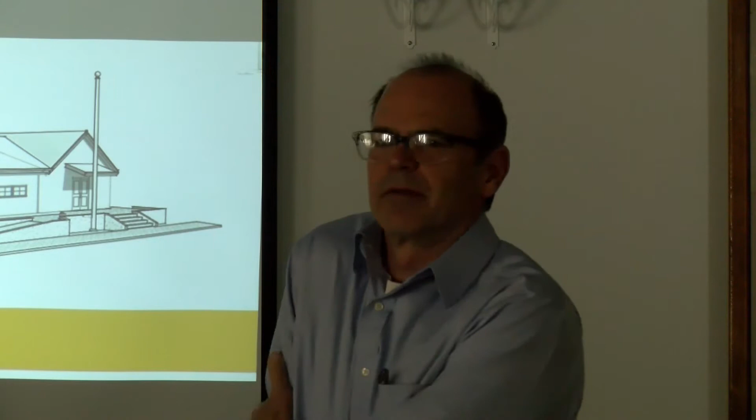Well, good evening, folks. Like John said, my name is Joe Slack. I'm an architect with a company called HGE, Architects, Engineers and Planners. I've known John actually for a long, long time - he was in the building product trade industry for a number of years, gosh, I think in the mid-'80s or early '90s, somewhere in there. So it's been fun getting reacquainted and working with him and all of you as well.

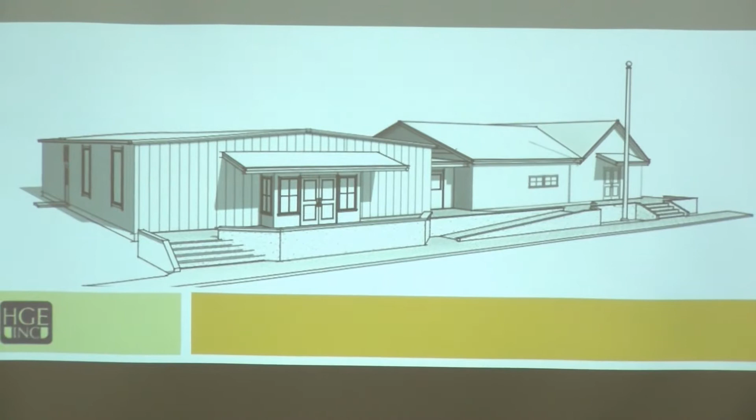Like John mentioned, the feasibility study encompassed what we call needs assessment and concept design. In summary terms, needs assessment means we spent some time poring through the building as it sits now, identifying various systems and issues that need to be addressed to extend the life of the building and make it more functional and more user-friendly.

And so we did that portion. We also put cost estimates on taking care of those shortcomings. And then subsequent to that, we spent time with the committee reviewing what the various needs are of the facility to make it function better. Based on that, we went into some concept design. I'll run through those relatively quickly, but if you have any questions, let me know.

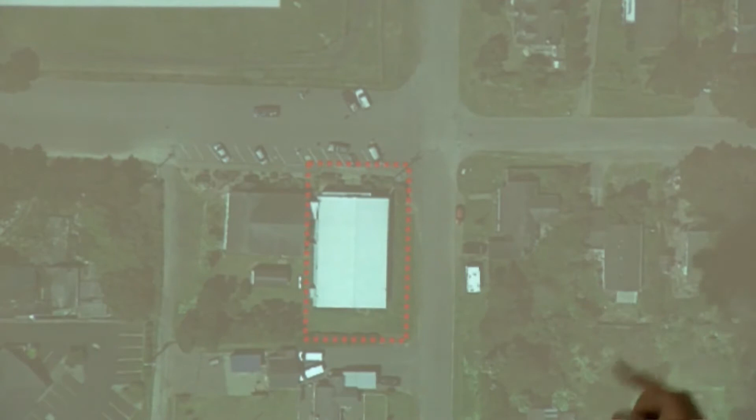So here's our project site. The big white rectangle, that's the community building. I think we had a date on it that was early 70s vintage. It sits right next door to the American Legion building, of course, and north is up. The school is across the street. The credit union is kitty corner on the same block.

And this is Dave's park project. What do you refer to? Peace Park. Peace Park, cleared off quite a bit. So our property is about where that red hidden line is.

So here's a photograph from, we're looking at the north side, the north entry. It's on the north side of the building, so it's primarily in the shade a lot. You'll see some close-up photos of some of the problems with that. So of course, the Legion building sits right between.

There's a kind of a funky sort of margin between the two buildings. It's covered. There is an ability to make it secure. You're not really inside, but then you're not really outside because it's got a roof over it. But it is kind of an open air transition space between the two. It's serving as a means of getting into the building with a ramp. It's a very breezy breezeway.

Yeah, I would imagine. So here's some other photos of the building. What we call a pre-engineered metal building, meaning it came into the site as a kit and bolted together, and then subsequently insulation was secured to the frame, some subframing, and then metal panels secured on top of it.

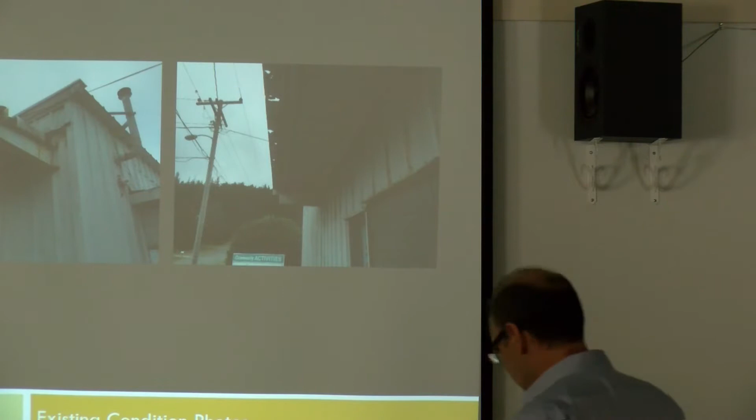The front, this is north side again. Because it's on the north side, it gets wet, and even though the rain's not pounding on it like south-facing building faces do, on the north side it doesn't dry out as well. So we have a lot of rust that's occurring on that north side. There's this little projecting awning that protects the entry, and that has to be removed and replaced in its entirety. It's really rusted through.

And then we have the front door of the building that when it was used, I think, more often as a theater, everything was kind of blacked out. So it's a really ominous kind of entry into the building space. You can't see into it. People can't see out of it very well.

And then, of course, we have all these steps to get to it, which from an ADA standpoint doesn't work. We have this ramp that is posing as an accessible ramp, but it's got issues with it as well in terms of ADA compliance. There's some real specific design requirements to make things ADA, and that has some shortcomings. It would need to be replaced.

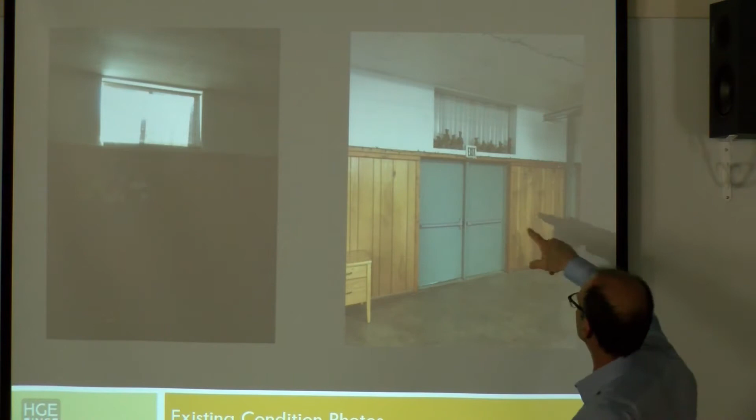Inside the building, here's kind of a dark photo, but you can see the high windows on the east side. This is as architects, we always kind of scratch our heads about stuff. Why didn't they move that door over to align with the... well, that's just the way it goes.

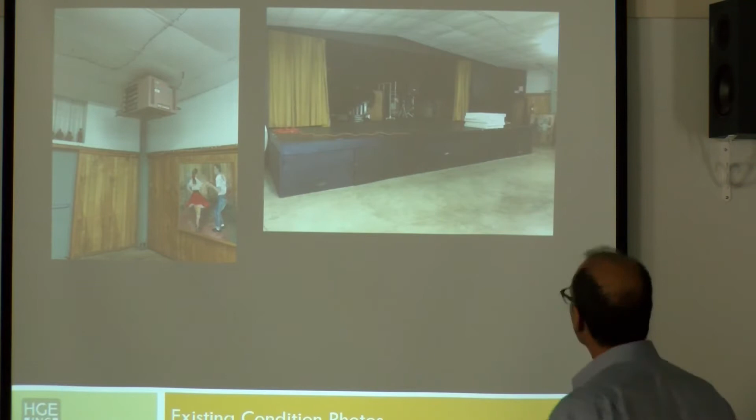So then we have this, a Reznor electric heater, which again you'd find in a shop or warehouse space. They heat the space in terms of comfort, but they're noisy and kind of distracting, so you'd want something else for the type of use you all have planned for the building.

Here's our stage. It really is a stage, 3 feet off the ground, and it functions fine. We don't have a big lot of room above it, but we need that to be ADA compliant too, at 3 foot high. That means 36 feet of ramp with a landing, so it's a little problematic with stages that are that high off the ground.

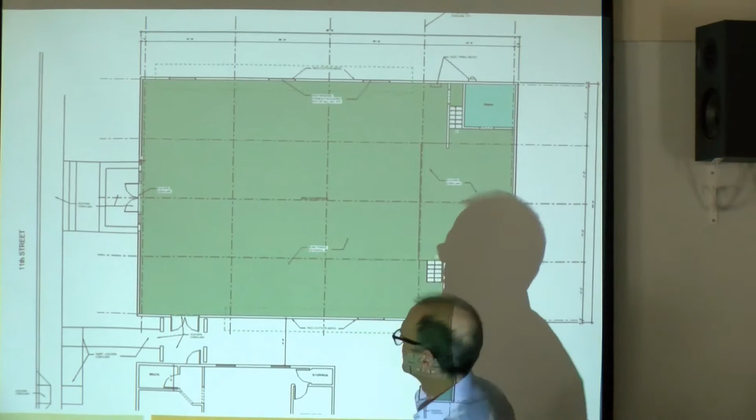So here's a floor plan of the existing building. Here's the steps I showed you, and here's that vestibule space. This space provides connection between the American Legion building and their kitchen, most importantly, to get into the community building when they have functions with food. We've got a pretty good sized kitchen that can feed it, so they really need this connection. There's not a lot of need for folks using the facility to go this way—it's mostly for this kitchen to serve the community building.

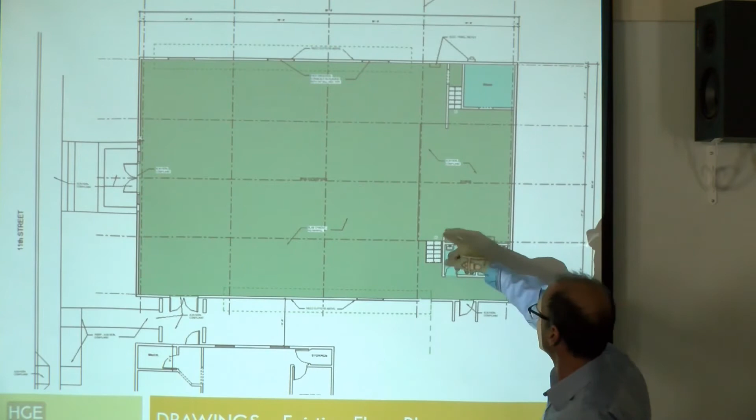And then there's a couple small restrooms down here that exist. This is a really funky women's restroom with 2 toilets in one little room—I don't really understand, I can't imagine 2 people being in there, but maybe so. And then we have the men's restroom. This right up here is the green room for performances, where performers have a place to change and get ready. This doesn't show the stage very well, but it comes out to this line. There's some steps on the public side of the proscenium arch, and then behind the arch on the east side.

So what else do we have? I talked about the windows. The floor could use some repair work. Pretty much every entry has ADA issues, and of course we have ADA issues with the restrooms. The ceiling is not all that dissimilar to this, where the insulation is laying on the ceiling tiles, and it looks great for the first few years, but then over time that insulation and its weight causes them to start to sag.

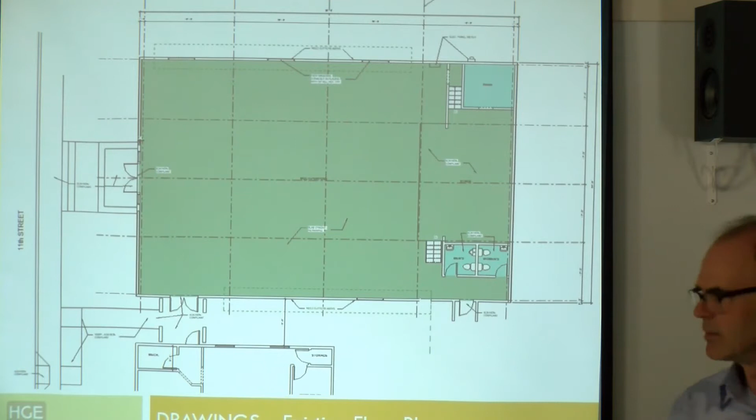So we'd like to put in a new ceiling. The roof has some minor leaks, but it does have leaks, so we're looking at reskinning the roof and painting or reskinning the metal on the walls as well.

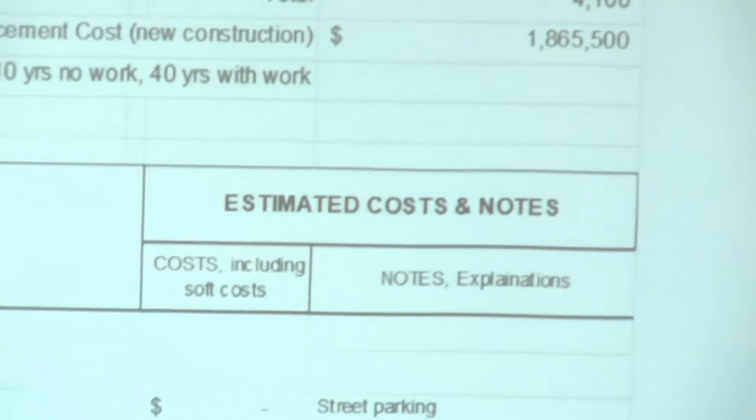So I'm kind of chunking through this pretty good. This is a spreadsheet on what it costs to deal with those needs assessment items that have been identified. We have a few things on the site work, but the building's about 4,000 square feet—if I include that little connecting vestibule, it's another 100 square feet, so about 4,100 total. If you were to replace that building as it sits now, without changing the footprint or the number of bathrooms or making the vestibule bigger, that's roughly a little bit south of 1.9 million.

That's using today's dollars, doesn't include land costs or anything like that. It's about 1.85 or 1.86 million. So for the site, there's a few site things.

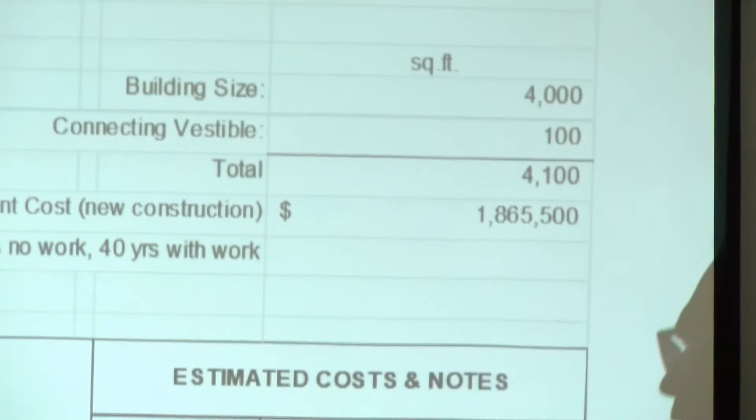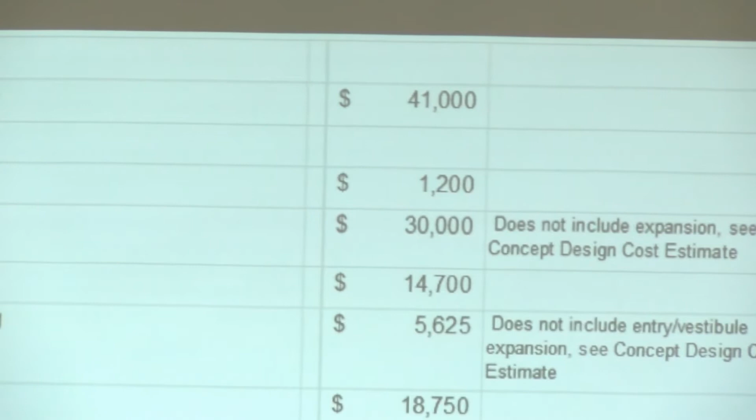Mainly access into the building to comply with ADA, and then we have an allowance for removing asbestos. We've got some rebuilding the restrooms, providing stage access with a ramp, replacing the awning in the front. I did plug in adding an entry vestibule—I'll talk about that in a minute—rebuilding that connecting vestibule, and then siding replacement and roofing replacement.

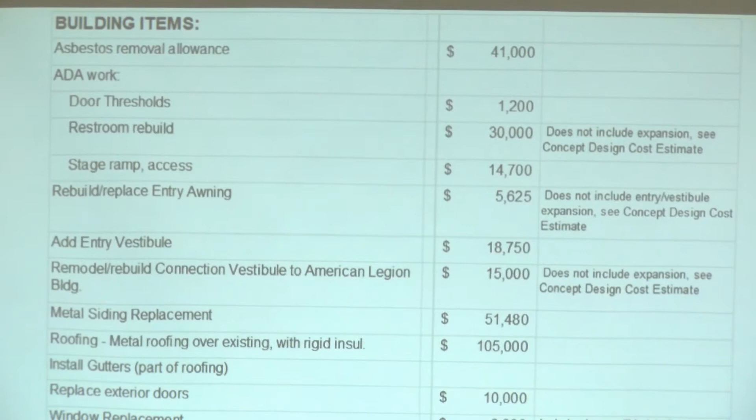Replace exterior doors, window replacement, interior finishes allowance to retreat the floor to improve the acoustical performance of the space for performances, and new ceiling and paint, those kind of things.

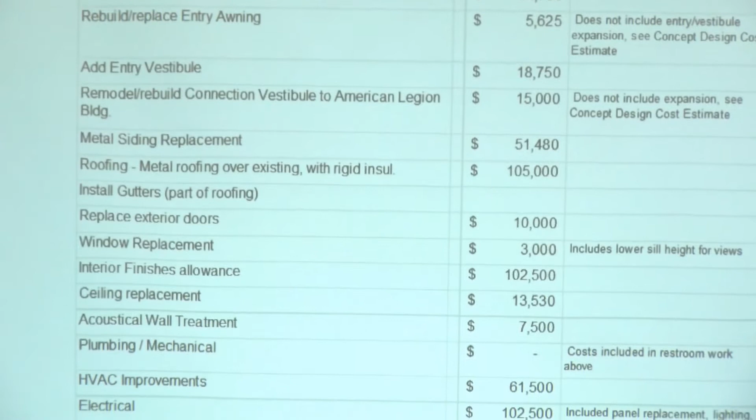Joel asked: Steve, would that include replacing the wood, the simulated wood wall panel stuff? Yeah, that would come out too—we'd just have a new, fresh interior feel to it.

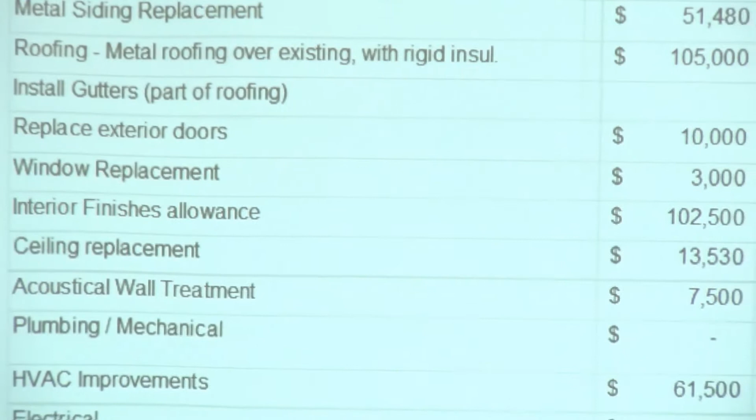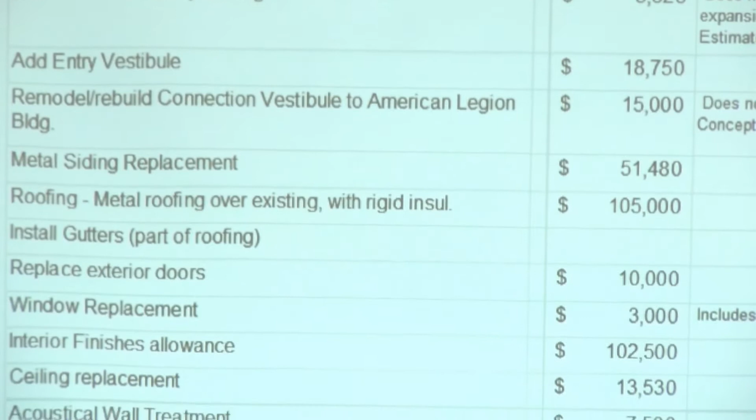I do have ceiling replacement identified as acoustical wall treatment, and the plumbing would be part of that restroom rebuild number. But we do have mechanical improvements—what I imagine is possibly something like a large heat pump that would be ducted, so you wouldn't hear it, providing ventilation and heat as well as cooling. And then we've got some electrical upgrades to do; the electrical panels really need to be replaced, they're pretty worn out. So that totals just under $600,000.

We have a little contingency, 10%, so we're at $659,000. And then we always have to include soft costs for whenever you do project budgets.

That's to provide design, engineering, and architectural work. We plugged in an allowance for furniture, fixtures, and equipment—things like chairs, window furnishings, tables, and the like.

Special inspections are required for construction these days. Of course, we need to deal with permits and fees and have some dollars for that, and then additional soft cost contingency to cover those things that we don't have listed.

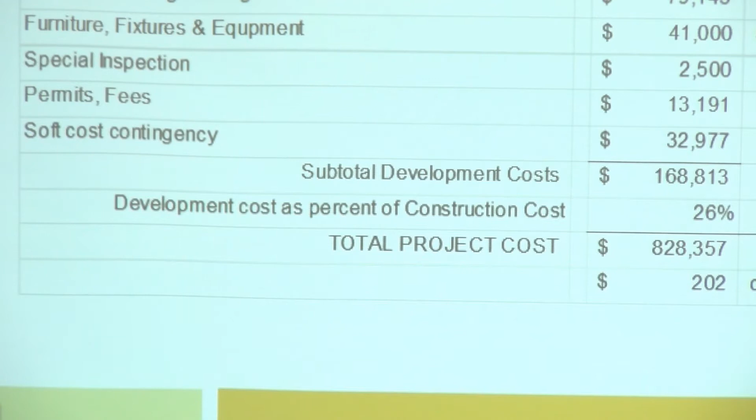So we end up with a subtotal development cost of $169,000, and total is about $830,000, or $202 a square foot. That's what we call a major upgrade on the building.

So then I'll start moving into what we discussed in terms of improving the function of the building, improving the usability of it, and making it more accessible as well as more comfortable. This is kind of small print, but it's just one page, so don't worry.

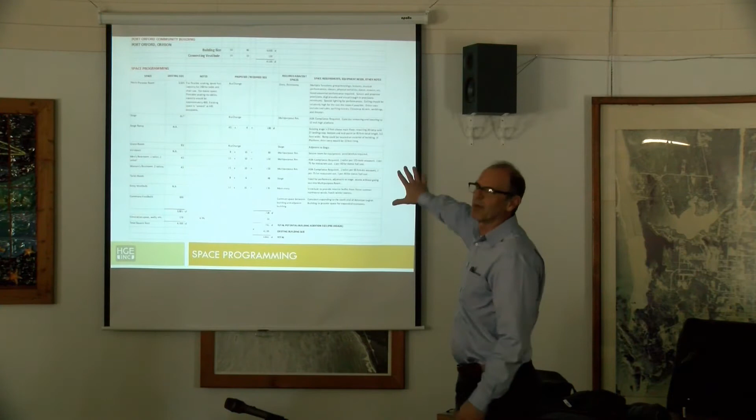I'm listing the spaces that are in the building now and the spaces that are desired or needed in the building to make it more functional. The first item is the multi-purpose room—what we talked about for group meetings, lectures, musical performances, classes, physical activities, dance, movies, etc.

Good acoustical performance is needed, and other uses include tool sales, quilting events, Christmas bazaar, weddings, and theater. So it's a real mixed bag of what we want to do in there.

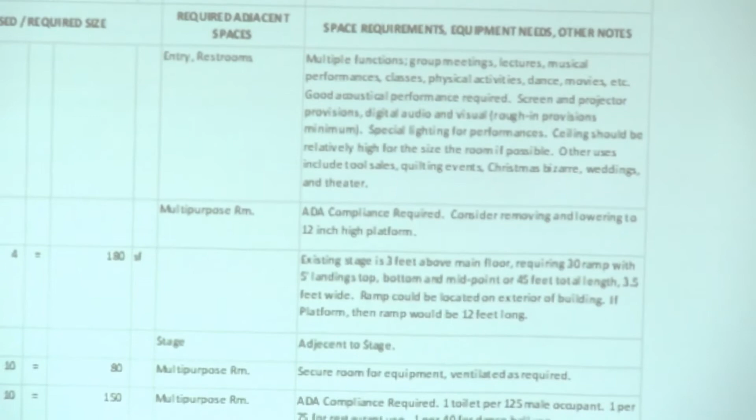So it has a lot of different requirements, and we want to make sure it has that flexibility. The size of it, based on our discussion with the committee, is fine—the space has a capacity for about 200 with tables and chairs, so we didn't mess with the size of the big room. The stage size was fine, but again we have that ADA issue.

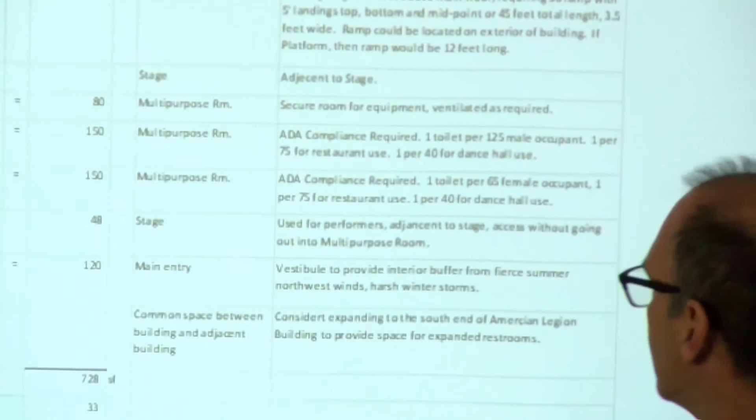Getting on top, getting up to the stage—the green room, there was discussion about getting rid of it, but with the performance part of the use of the space, we wanted to keep the green room in, so that remained.

We do need an AV closet that it doesn't have now. And then the men's and women's restroom, there was a lot of discussion about that. We could just turn those into two single-user bathrooms, but from a code standpoint, if the American Legion Hall is not open and accessible, you need to have more than that.

So on the men's side, would there be a urinal and a toilet? It has that now, but obviously people are going to lock the door—it's not a multi-user space.

And then the women's would be a normal two-stall room with a handicap stall and a regular stall. We don't have the room for that.

We also talked about having a toilet room available to performers, so if there is a performance going on, they need to use the facility without coming out into the seating area. There'll be a restroom available on the back of the proscenium arch for their access.

We did talk about an entry vestibule, given the big, fierce northwest winds we get in the summertime—having a vestibule, meaning an airlock where you come through a door, that door closes, and you come through the next door to get into the space.

It provides a little more comfort for people in the room, some thermal break, but it also provides a buffer for those folks sitting in the back of the room. I think I busted through that.

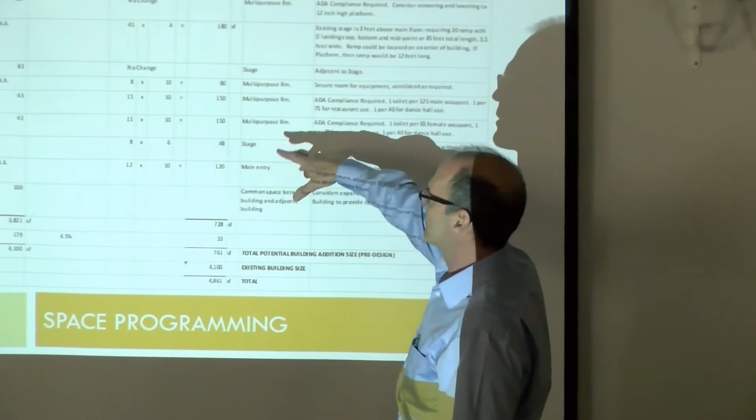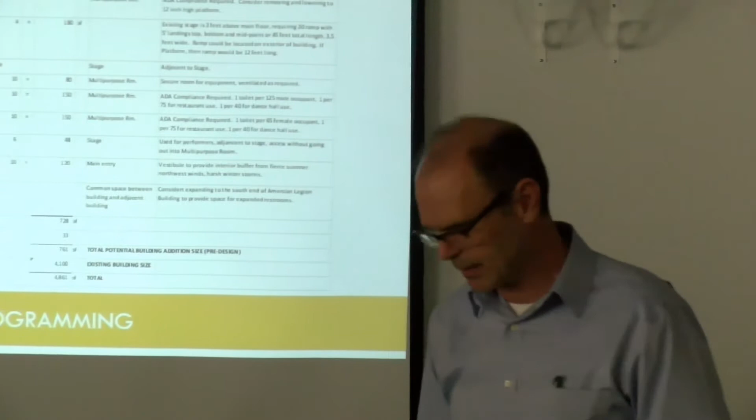So right now there's about 4,100 square feet, like I mentioned. With these additional increases—like in the restroom and the vestibule—we need about 4,800 square feet, so we have about a 700 square foot bust, so to speak, that we need to find more room for.

We would rebuild these bathrooms, but we utilize the foundation that's intact there, and we take this vestibule out and rebuild it.

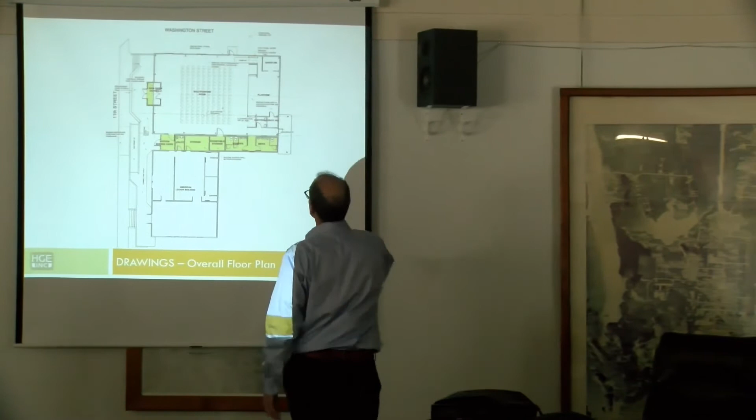This shows the community building and the American Legion building. Like John mentioned, this American Legion building is a work in progress right now—we haven't gotten to the point that the community building is, but this reflects what the folks want to do in here.

Dick and his committee want to expand the size of what's right now a kind of common space here, and we actually expand that room up. The yellow represents new construction.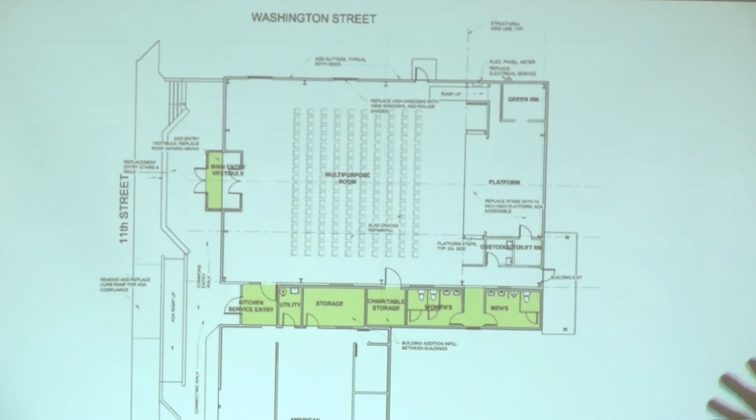The yellow is what we add on to the building. We'd basically take that little vestibule and stretch it the whole length of the community building, and that would create restrooms and some chair storage to serve the multi-purpose room. Right now the chair storage is under the stage, which is common in schools, but it's also problematic because they have to crawl underneath the stage to pull stuff out. Nowadays they make it simple with carts, so tables and chairs can be on carts, easy to push in, and we'd have a room to accommodate that.

The American Legion building needs storage and a utility room to mitigate the utility room they're taking out, so these two spaces would feed the American Legion building. This would really be the kitchen service entry space, where they can come right in the kitchen with delivery.

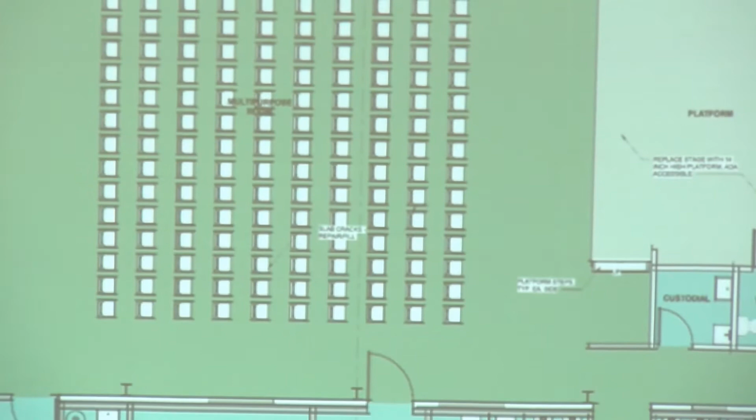I'll probably come back to this slide. So here's a close-up on the community building. Again, we have a new front door. Oh, I didn't share the thought on the entry out front.

We would make these buildings a little bit more connected with an easier flow between the two, providing some continuity between the buildings. We'd have a connecting plaza or walk that would go the whole length of the two buildings from one end to the other.

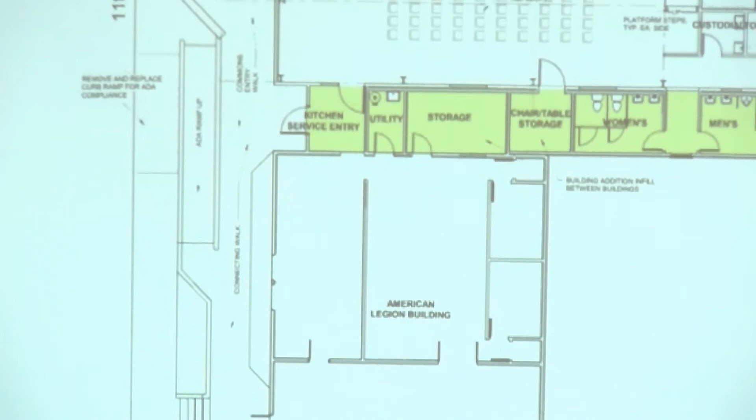We would build just one ramp, one ADA ramp, that would serve both buildings. It's also in the middle, so if they have hand carts to get service supplies into the kitchen, they can utilize that too. It would be elevated up at the level of both buildings, which have to be really close in floor elevation—within an inch or two. So this plaza could accommodate both buildings.

And then we have new stairs to serve directly into the Legion building, and we'd have stairs at that end that would serve the community building.

We poked this out—we're about 30 inches off the sidewalk level. We pushed that out because there were comments about having some space out in front of the community building for milling around before folks actually come into the building. So we're trying to create a little more breathing room in front of that door, and that could actually be a kind of seating wall as well.

So, Joe, you've had falls out there in that area, I'm sure you have, with weather and so on. So could we have handrails?

Yeah, I'm running this new software and I'm kind of the one doing it. We have a couple other people in the office with a little more command of it, so I haven't figured out how to draw handrails yet, but when we get to the final design, yeah, we'll have handrails.

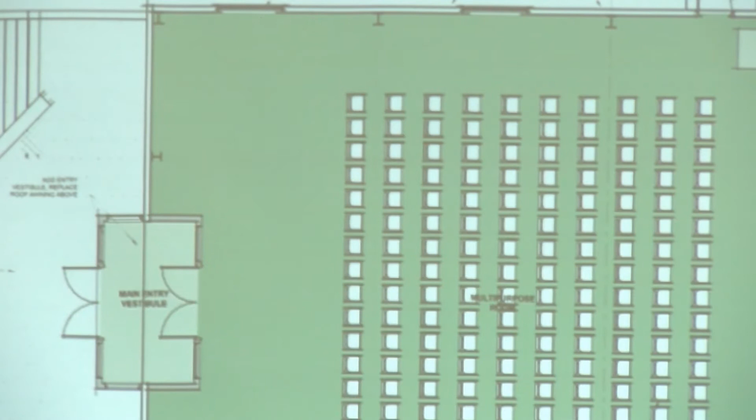Okay, then both stairways. Yeah, so again, front door, new vestibule, new walls out in front, seating.

This just shows chairs, no tables, and then we have a platform that's 12 or 14 inches off the ground, and then that storage underneath would be fed and served by this room.

We preserved the green room, and what we did here was convert the boys' bathroom into a custodial room. We really need a place for mop buckets and those kinds of things. We'll enter the custodial housekeeping room right here, and then we have this toilet room.

Basically, we just lift the floor up even with the platform. This door would serve this bathroom, which could be for performers, whether it's a band or a play or what have you. That actually was a pretty efficient use of the plumbing we have.

We won't have to do any saw cutting. Whenever you have slab on grade, you're always going to saw cut sewer, so we'd be in pretty good shape for that.

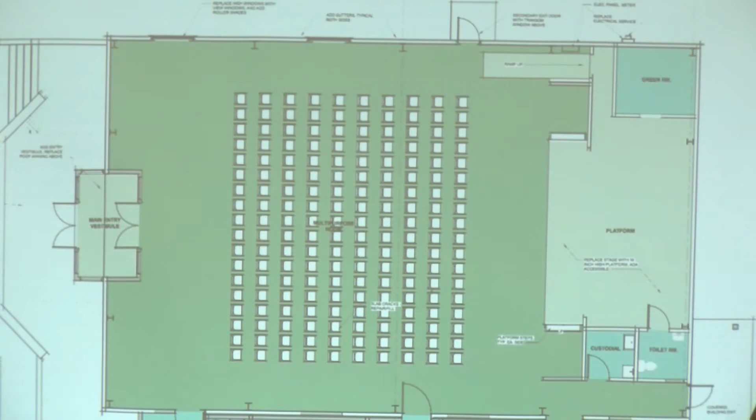And then our new restrooms will just fill this margin, about 10 feet wide, the whole length of the building. Men's restroom here, women's here—there really is no magic on which one's where.

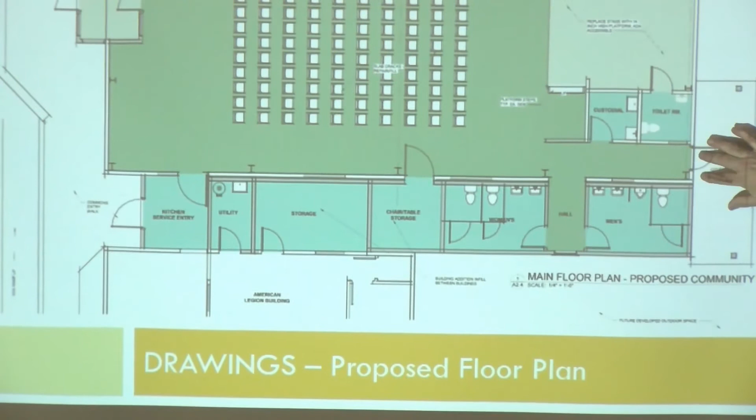We have this short hallway that feeds that, but we'd also provide a door. The exit out of this end of the building would be down the end of the hall. This came up during our last meeting—it'd be nice to have this more covered so folks can actually stand out here when the weather's not so great.

This also opens the door to future development in this wind-protected, leeward, south-facing space that we always like to see develop. Our buildings are natural windbreaks, so if you're lucky enough to have access to south-facing open space, I could see this becoming a lot more developed as time goes on.

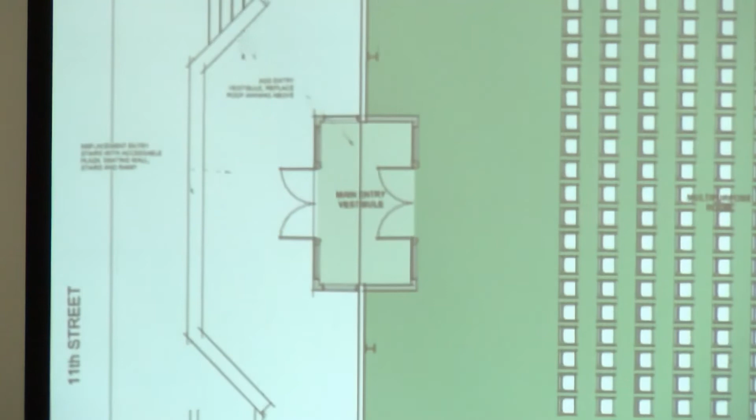We also talked about another exit up at the top on the east side. At our last meeting there was discussion about adding another exit up there. We'd talked about that lower right-hand exit being between the restrooms, which is problematic from view lines, and your observation that that's a nice outdoor park barbecue area leads to the location you just suggested.

This whole area has very nice south-facing spaces, like at your house or where you work, but you just know these turn into really nice areas.

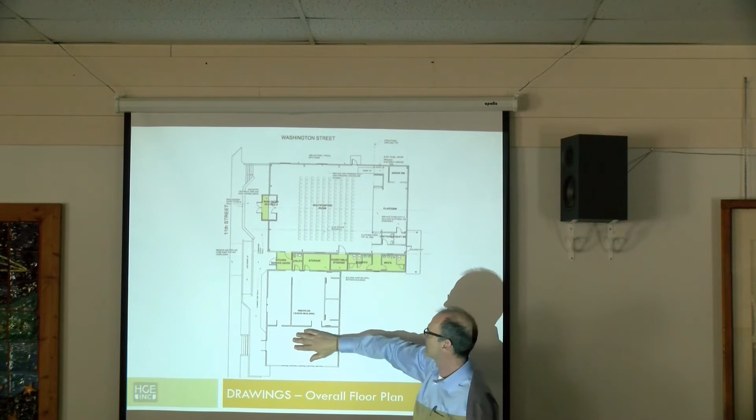A couple comments about what we're doing design-wise here. As I mentioned, we're expanding the kitchen all the way to the end wall, but we want this space to be connected more to this building also. We haven't fully fleshed that out, but there's an opportunity for another door at this end of the room that could serve a connecting walkway plaza space to really open things up. There are no doors on the south side of this building for some reason. We're also looking at opening this wall up for bigger events so they can spill into this T-shaped space.

So if I'm in the American Legion building and going to the community building, how do I get there without going outside? Well, that's not really been a requirement, other than the times when you have a function here, like bazaars or Christmas, where we go back and forth a lot.

You can still do that, right, through the kitchen service area? But aren't you now going right through the end of the kitchen, and you can't do that for a handicap entrance. I think it needs to be fleshed out some more, it's not totally resolved.

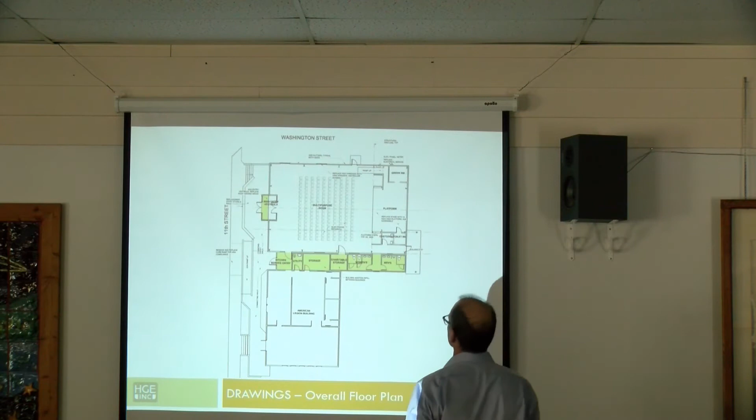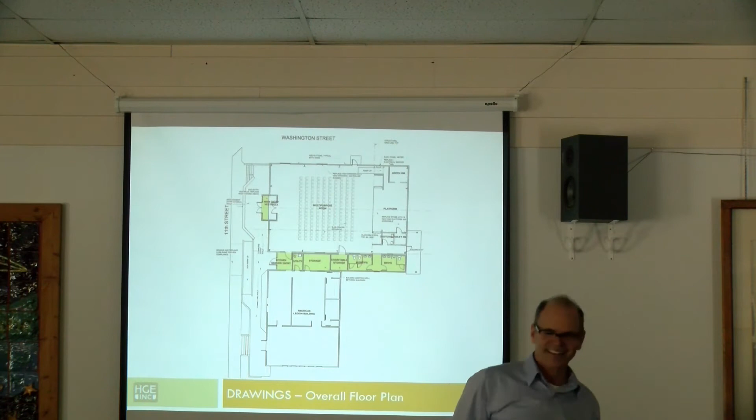Right now the discussion has been that when this building's closed, there's really no reason for anybody to go over there. And when you're having a function here, the function's in here, so the only people doing this are working the function. Whether that's true or not -- a lot of servers say it's not true. So there's an easy fix: just slide this over and have a connected hallway, or make this fatter so people could flank the kitchen and get in. It's not a big deal, it just takes a little out of somebody's storage space.

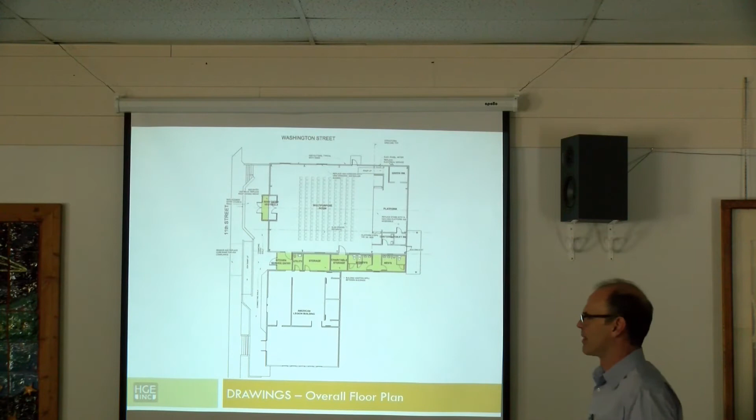So this door -- if you have a big blowout function where you're using the entire facility, folks are in this space and this space, that's why this door could make sense, giving a connecting walkway between the two spaces. But you'd be going outside, and that could be an issue. Well, exactly, right.

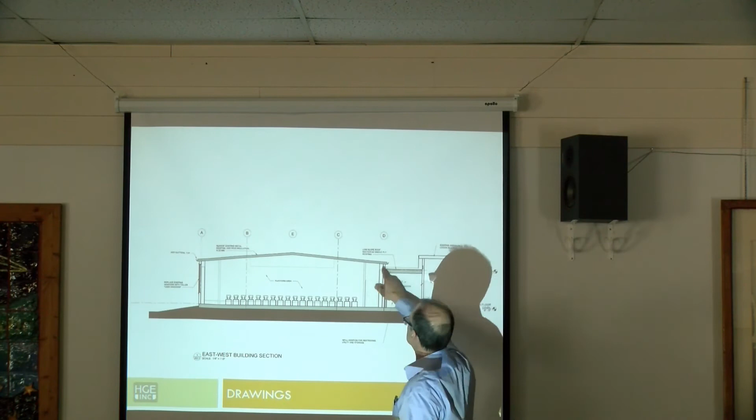So here's a cross-section, pretty fundamental really. This is the existing shell of the building, and we rebuild the building envelope with code-level insulation, replace the roof, add rigid insulation on the roof deck, and put the metal on top so we have more opportunity for creativity with the ceiling appearance. The platform is going to be lower, giving us more room on the stage for performances. And then here's this infill space, and this is the Legion building.

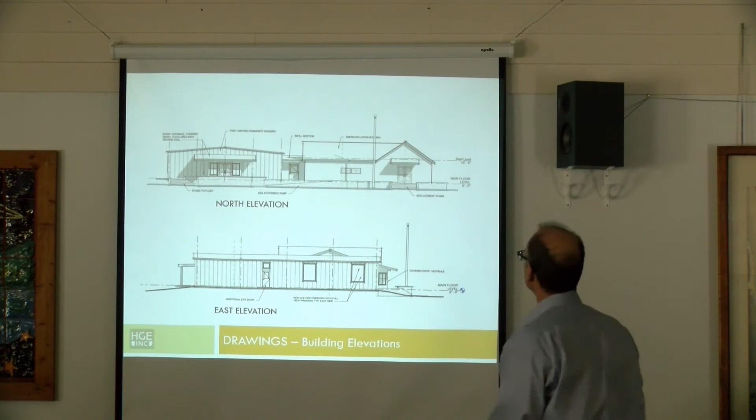Here's the elevations of the building. So here's our community building right here. There's the service access to the kitchen. Here's the elevated seating wall for the community building, and then here's the connecting plaza. I threw in a flagpole just recently as a way to mark that space even more.

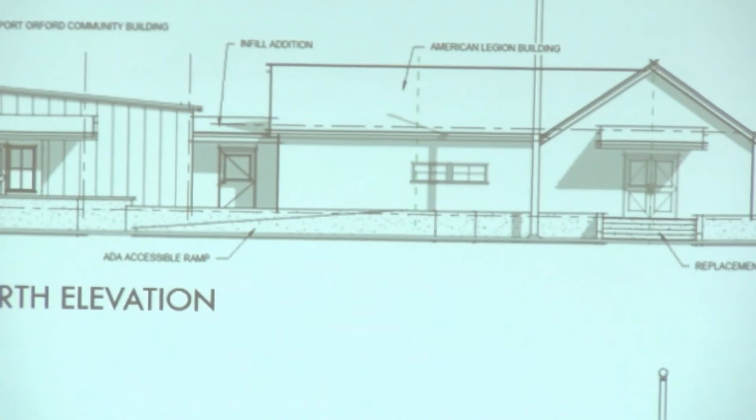This is up for discussion, but the buildings are so different architecturally, they're just not the same kind of building. We didn't want to make them the same, so it'd be nice to have some elements that are common. The plaza will do that.

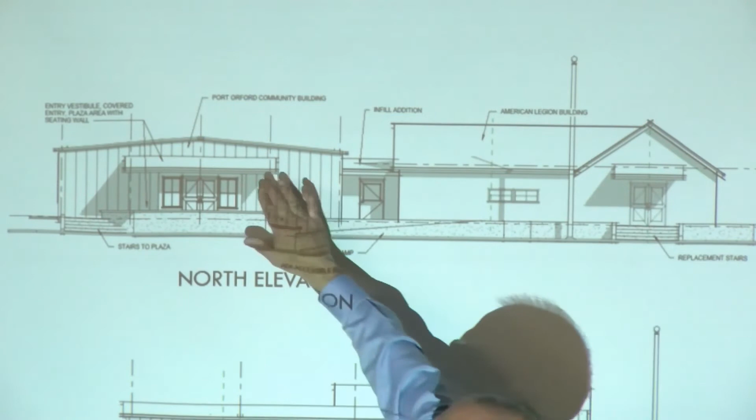You could possibly put siding on the metal building to match the Legion building, but I don't know if that's all that advisable. We'd probably just stick to metal siding. What I am suggesting is that we tear off the covered porch on the Legion building and rebuild it to match what we do on this side, and that may provide a little bit of continuity between the two.

This is the east wall. Remember those windows are up high, so we drop those down so they're at a 3-foot sill height. What it means is that when you're in that space, you have a lot more connection to the outside. There's our second exit out of that space as well.

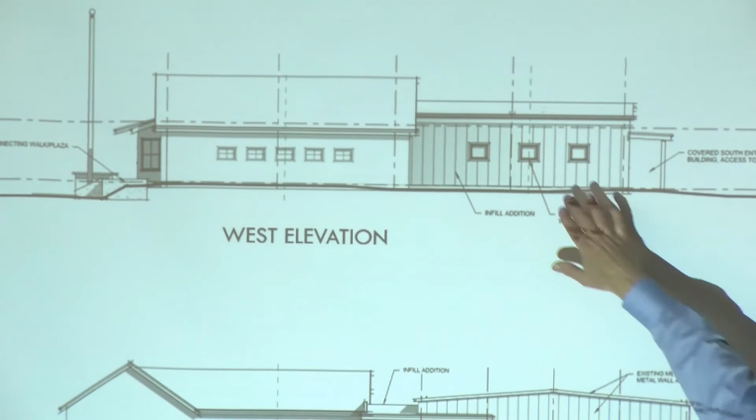Here's the other two elevations. Here's the existing Legion building, and this is that margin infill space with the restrooms. We put a couple obscure glazing type windows in the bathrooms as well as in that restroom hall. We talked about punching that hall right at the outside, but it doesn't work that great for sight lines, so we just had it serve the restrooms. Here's that little covered entry off the back end.

Here it is again on the south side, so there could be a door here. We could actually provide a covered walkway that will connect those two, which might be rather attractive.

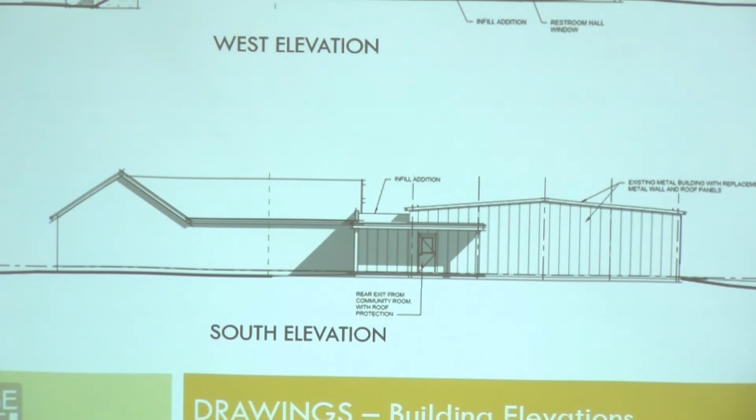Is it cost prohibitive to change the pitch on the metal building? Because that's an awful low pitch and invites leakage. We'd want to bring the elevation up a little bit and pitch that roof a little bit more. You could do that, but you'd probably just replace the building, because as part of the superstructure, I don't think you could add that much weight to get that. It'd be pretty tough.

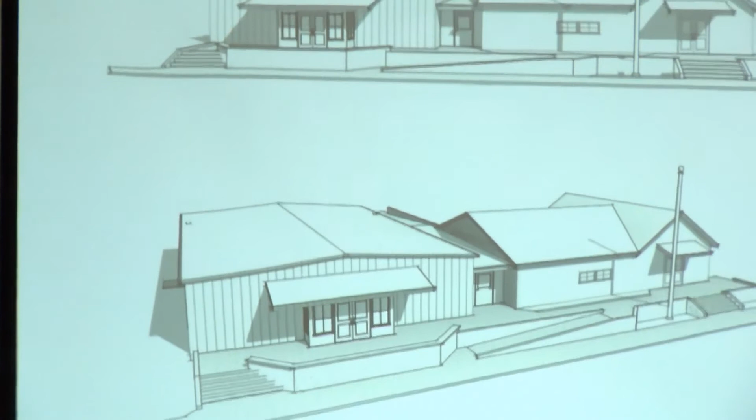So here's some three-dimensional drawings. This is kind of a bird's eye view of the plaza. Here's our ADA ramp, and I'll have the handrails, I'll figure out how to draw them by the time we get to that point. Here's the stairs up to the Legion building, and stairs kind of flank it to the left to the community building, just so we have this nice margin out in front with the surface entry. That's the more down-at-street-level view of the front of the building.

Now, in front of the community building where it comes out, that looks like an accident hazard without railings. Maybe there needs to be a back to the bench or something, or maybe we don't want benches, maybe we just want a rail. I think the rail is totally fine. It's just a thought, since there's the plantings there to the north, maybe the back of the rail could be a narrow plant area instead of a bench.

We have a little bit of planter space here, planter space here, and of course on the side. But yeah, this definitely can be worked over.

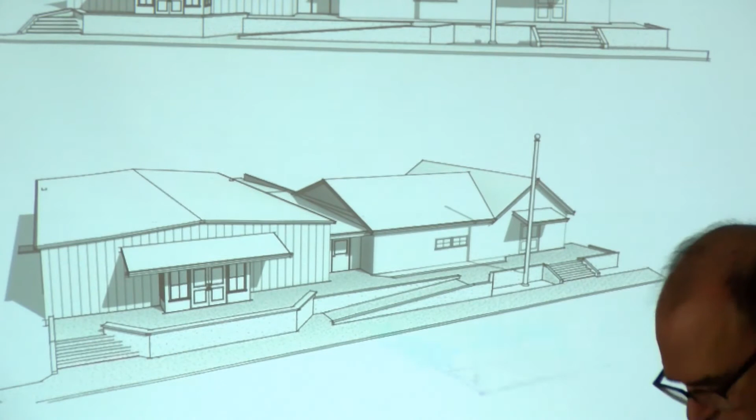And here's the back side. Here's that covered exit out of the community building with the roof coming through, what we call low slope roofs. It has pitch, it's not flat, but we have a gutter line out here on the edge. There's the bathrooms, this edge right here. This is another view showing that exit out of the building on the east side with the larger windows.

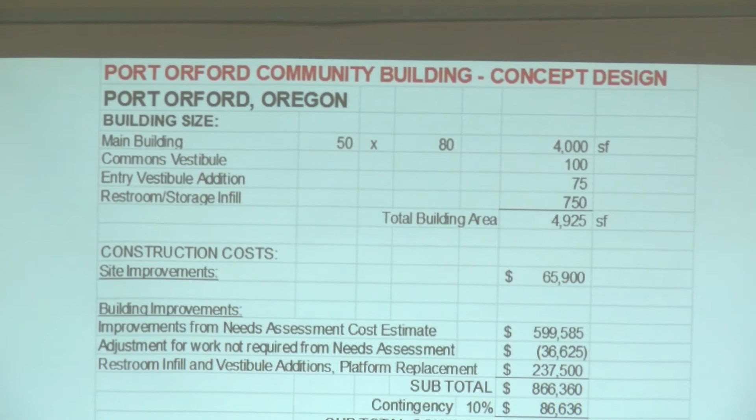And then cost, this is a summary of cost. So the scope of the building is about 4,900 square feet, 4,925 — that's the original 4,000 plus the commons vestibule which was 100, and then the additional infill being 750, and then we had 75 square feet for adding on to the entry vestibule, so we're at 4,925.

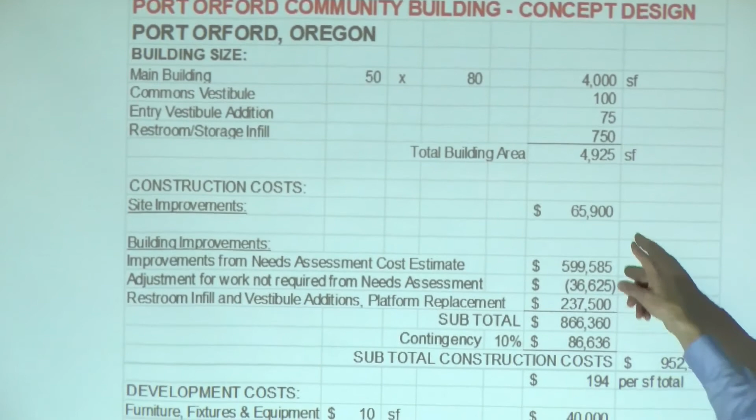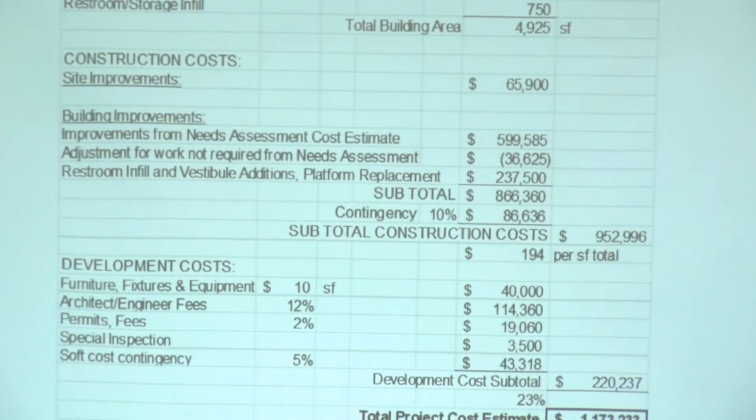We've got more site improvements than the needs assessment just because we're building all that connecting plaza work. And then the building improvements, this is from the needs assessment. We get a little bit of credit because some of the needs assessment work we wouldn't do, like we wouldn't build the 35, 40-foot long ramp to serve the platform, because now it's much smaller, and a couple other things.

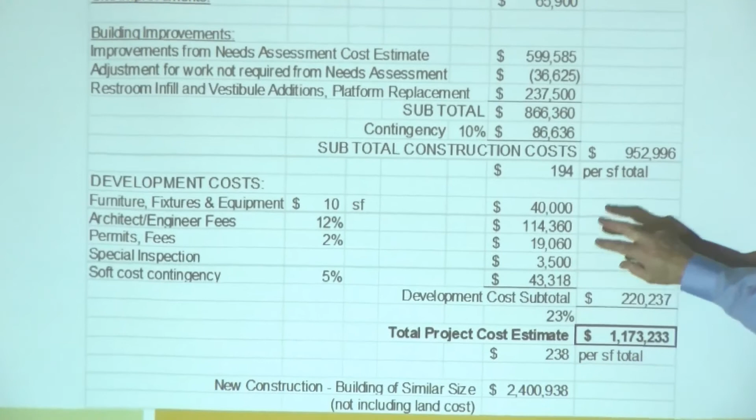And then here's the cost on the infill. So we're at 866, and with the contingency we're about $953,000. We're about 194 a square foot. And then again, we need to make sure we plug in development costs, or what we call soft costs, and those are at 220. So we end up with a price tag right now of 1.173, or $1,173,000.

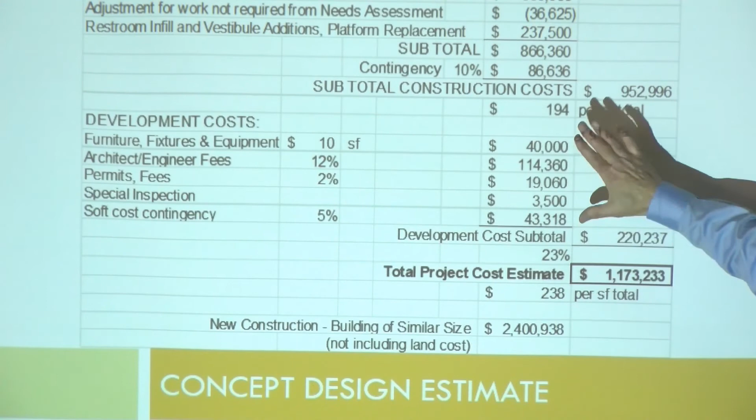So a new building of similar size, we've debated this more than once. If you take that square footage and multiply it by today's construction costs and plug in a percentage, I think I used 30% instead of 20. This percentage right here, 23%, represents what these numbers are in relation to construction costs. But this size building times today's current construction cost plus development costs, we're about 2.4. So it's not quite half. It's approaching half, but it's not there quite yet. So I think that's what I have for that.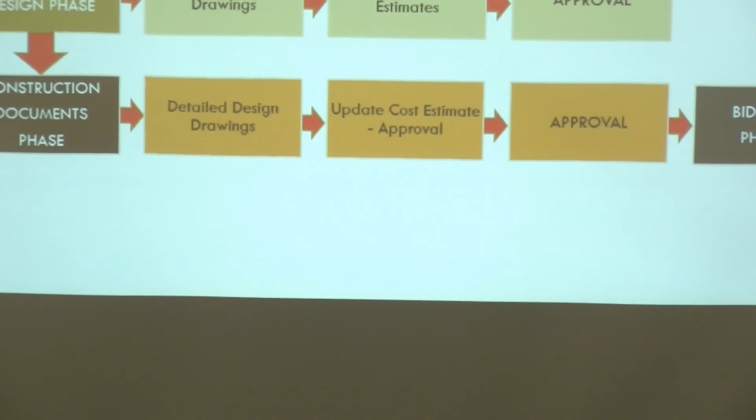Oh, a couple more. Joe, what would be the life expectancy of the building? Well, 50 years is sort of a standard number we use. If you spend that kind of money to upgrade your building, you get a lot more life out of it. You still have to paint your building, still need to repair or replace the roof, still have to maintain it, but we kind of figure all these things as lasting a long time.

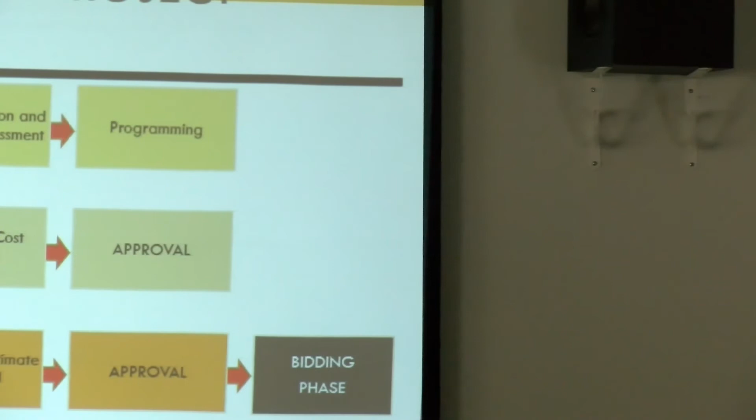Well, there's a bit more to that answer. The building right now does not comply with today's requirements. They've changed dramatically from the 70s to now for both seismic and wind. And of course, both buildings are in the inundation zone, so if that ever happens, they're gone anyway. Joe's correct that the improvements life would be about 50 years, but neither building can be expected to structurally survive any major trauma at this time. That becomes part of the tipping point: do you keep putting $10 saddles on $5 horses, or do you change horses? It's a complex question.

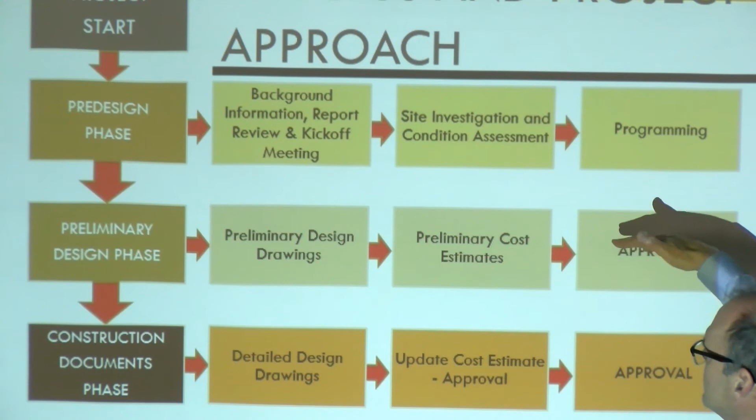I just threw in this slide, I ran across it and it kind of refreshes my brain. This is, from an architect's standpoint, designing buildings from start to getting ready to start construction. We spent some time in the pre-design phase, where we did site investigation, condition assessment, programming, and then we jumped into the preliminary design phase, what we call concept design—so we're in that realm right now. But once you get past that point with funding, you'd enter the construction document phase, and then you'd end up getting ready to go out to bid. So it kind of just helps explain how we work.

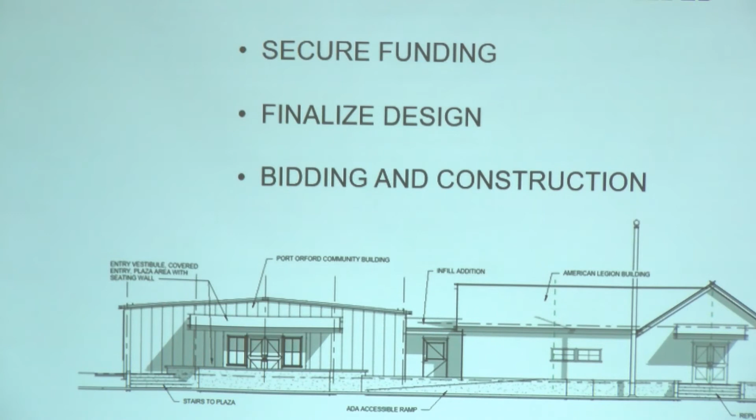So this is the last slide, and the next steps: I owe John a written, assembled booklet of our design drawings as well as our cost estimates and narrative, but we're about there. Then additional presentations as needed, and the rest is self-explanatory: secure funding, finalize the design, deal with the railings, and have more discussion about that connecting passage from the Legion building into the community building. Bidding and construction would come after that.

So you might address quickly what the business relationship is between your firm and the American Legion project. It's relatively new, and you're continuing, but under a different timeline basically. Dick is here now, too - Dick Wolf. We just formally got approval a week or so ago, and we've actually been jumping into it prior to that.

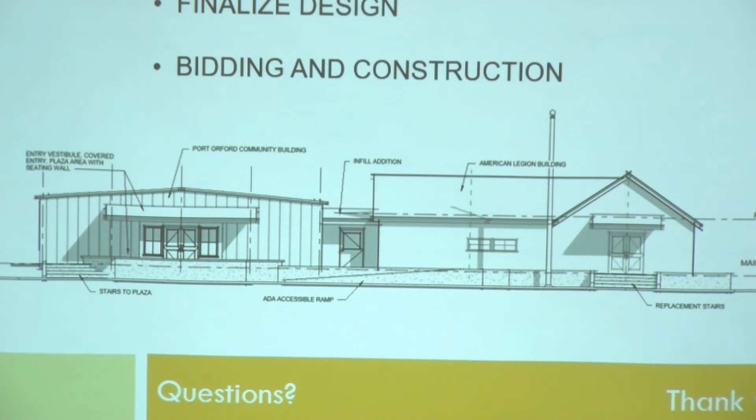So we need to meet with the Legion folks and go over some design ideas that resulted from the efforts they've done in the kitchen, and also ideas I mentioned earlier about connecting to the outside. I'm being rather bold to suggest tearing this off - I need to get some okie dokie or a head nod on that. So those are the kinds of things I've taken the liberty of jumping into. Then we will bring that up to this level, and you could still have a package deal if you wanted to package it together.

The scope on the Legion building is much smaller than the community building. And to throw out another whole set of ideas - we were successful in obtaining the property between the American Legion Hall and 101 on 11th Street, which for many years was just covered in trash. So the trash is gone, and the house will be gone as soon as Mike and I find a place to take it.

And you start thinking it through on that parcel as to what would work for a park - Ann came up with the name Peace Park. There's a whole bunch of ideas, but there are two things you can't really fix: one is the noise, and the other is the hazard to children from 101. So that starts you thinking a whole new concept - something like the library, smaller than Florence's community building, but as a multi-purpose community center on the Peace Park property with these two buildings. At some point, their lifetime is over, and then they could become the park and parking.

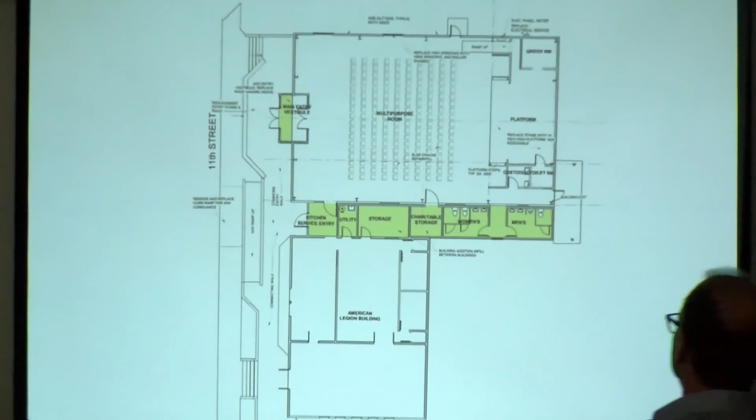I don't know if I can answer that one. We can strike a line wherever, but where it gets fuzzy is in between the two buildings. You've got this chunk serving this space, this chunk serving that space - so for the community center, the common areas, and the Legion Hall, what are the funding sources and the oversight for all of it? Yeah, I don't think we know. I think that is one of the next big questions.

It is this facilitator's position that we've got to start with something from a design standpoint. And when I look at the community building, I want to turn immediately because it is a very ugly situation. So as a facilitator, my concentration was on the community building, and there is that common space that will be served by both.

Funding really hasn't been a hot issue with our committee yet. Whatever we do with these buildings has to be approved by first the Parks Commission and then the city. If the two approve of a concept drawing or design, then we can sit down and start talking about how we're going to straighten out which goes first or second, whether we run them together or not. I think that's a bigger question once we get beyond the design thing.

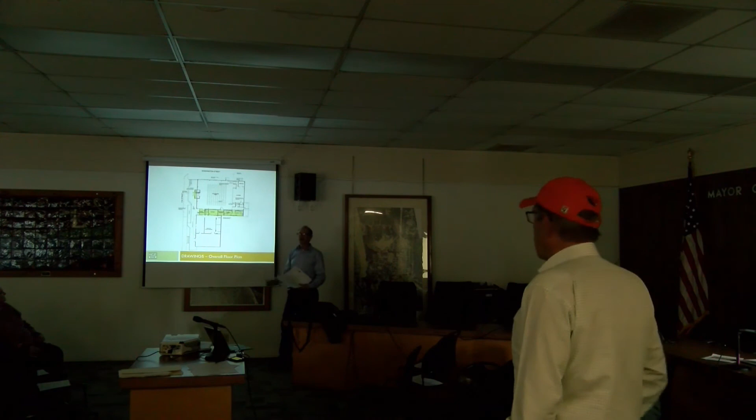Yeah, I think it's a really good question you're asking. We just, like John said, need to figure it out, because right now the construction costs include all this and it's benefiting the new build. So do we draw a line around that and have this as an alternate bid, the part that's serving the Legion Hall, so there's a clear delineation of what these 3 spaces cost? We do that kind of stuff all the time, but we need to know where to draw the line. Right now our construction numbers cover all this, and they cover that, plus everything happening in the community.

And the liability—if something happens in that stretch of things. I'm just thinking everyday liability, what if something happens in there? Well, my understanding is the city of Port Orford owns both. They're both city-owned, so the ownership makes a lot of sense to just package it as one big project and see what you can do, because it's less costly for mobilization and demobilization to do it all at once.

But you guys aren't getting the same funders, going back—and then I'll quit. You aren't getting the same funders. I don't know who. We don't know that.

At this stage, that decision hasn't been made. Does the American Legion have a funding source that's more governmental? No, neither one of us have a funding source.

All we have done is establish two committees: one for the renovation of the Legion Hall and one for the renovation of the community hall. Those are two separate committees. They don't meet together, but they're working on it.

So now the community building hired Joe. We decided that since these two buildings are coming together and working together, and you have to have one to serve the other, it would be a good idea for us to also hire Joe. Joe is going to come back now and look at what we've been doing, and then when we get this done, we'll come up with specifically what the Legion Hall's responsibilities are and specifically what the community building's responsibilities are. That's our plan right now, and then we'd go out for whatever funding we can find. We have no idea what we have, and some of it may come with conditions.

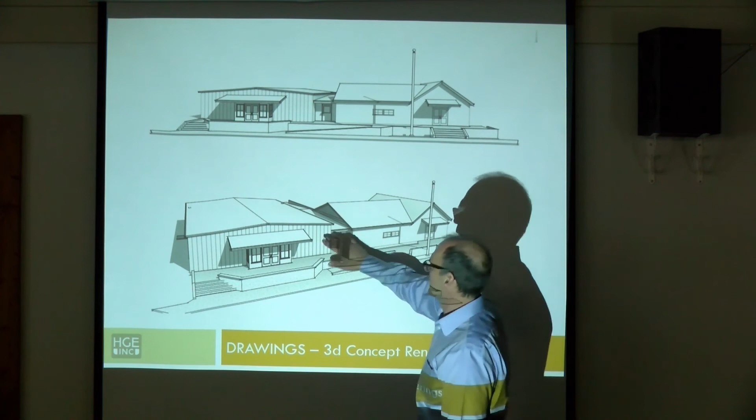What we could do - I call it a cowboy front - is extend this parapet up to come straight across, to hide the pitch of the roof. Maybe get rid of that flat A-frame metal roof facade, and you could put like concrete board or Hardie board on it.

I just have to be careful of that. The thing with these metal buildings is they're designed differently than wood frame - they move a lot more. So when you try to put materials on them that you'd find on a traditionally built building, you may get stress cracks or problems with nails popping. My gut feeling is to stick to the type of construction the building's designed for - it's proven. But a facade would tie that in a lot. I hadn't thought of that, though. Somebody said they liked that.

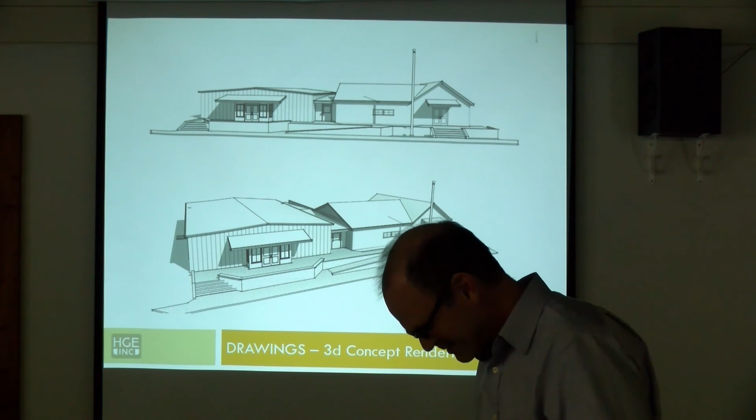How about a cupola instead? What was that you said? Somebody said it looked like this.

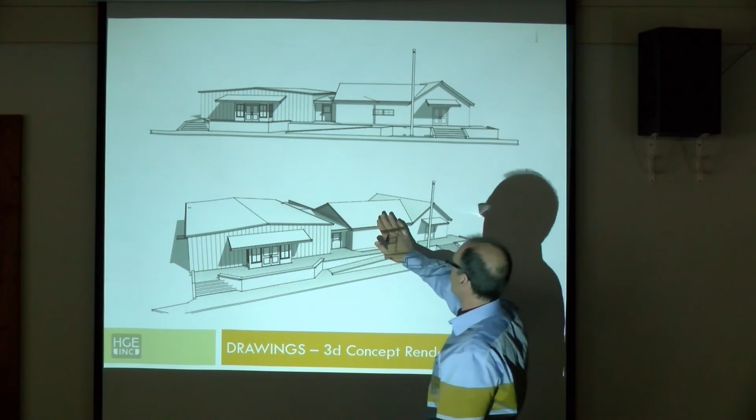I call it a cowboy front, where you have the western straight front wall with columns down below. When you come up, it comes straight across so you wouldn't see the pitch of the roof. It'd be a nice base, and it would actually provide some room for signage, and it would stand a little more proud. Right now this has a really low pitch, this is a little taller - this is kind of downplayed, so that might help.

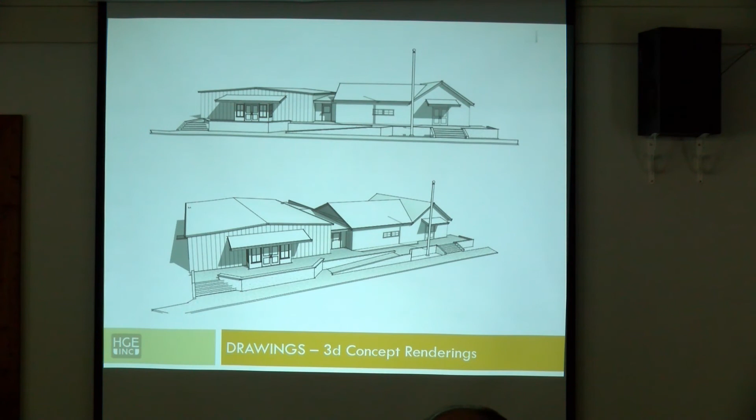What if you had events in there? Would the wind be a problem though? We'd probably have to design it to keep it short - we don't want it to bend. But with that low pitch, it wouldn't have to be very high if the main goal was just to hide the pitch of the roof. I think that looks really nice, but more wind would take it away - airborne.